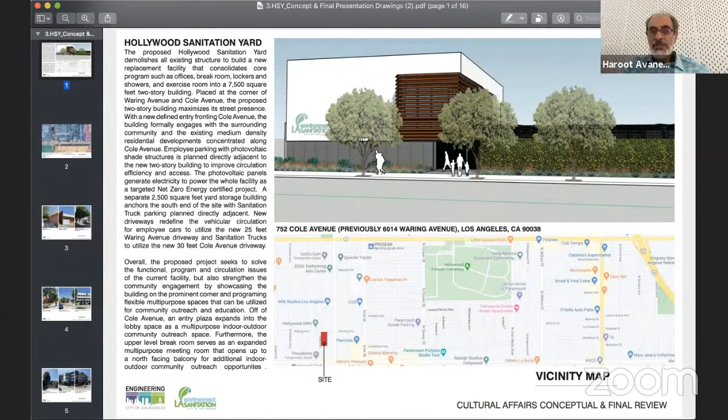Celso Del Pozo is the project manager from the city, and it's all city designed and presented - city architects. Jenny Lim is the architect, and design associate Melissa Lam. I saw their names waiting to present. So will it be Jenny Lim or Melissa Lam presenting today? Might be Celso that does it. Celso? Oh, is it Celso? Perfect, we'll hand it off to Celso.

Yes. Celso, are you there? Are you with us? I'm here, can you hear me? We can hear you. Oh sorry, I was looking for a visual, but yes, if you'd like to give a little introduction, or will you be presenting to us today?

Just giving an introduction, as Harout said, this is a new project. I just want to give you a quick overview of what this project is all about. This is the third of a series of five sanitation yards being redeveloped. The first one we did is the South District Yard, in Council District 8, which we just finished construction on last July. We're doing this one after the other.

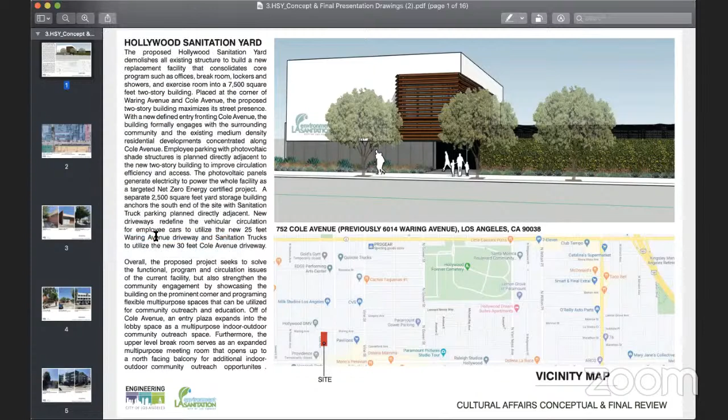The second project we did is the North Hollywood Yard, in Council District 2, which just started construction last March. There are two other projects in the pipeline - one in Council District 3, and the next will be West LA, I believe, in Council District 5. With this Hollywood Sanitation Yard, it's expected to start construction about mid-2022.

The primary function of this yard facility is to house service vehicles that are dispatched daily to maintain and service storm and sewer infrastructure throughout Los Angeles, including responding to everyday emergency calls for service. Next slide, please.

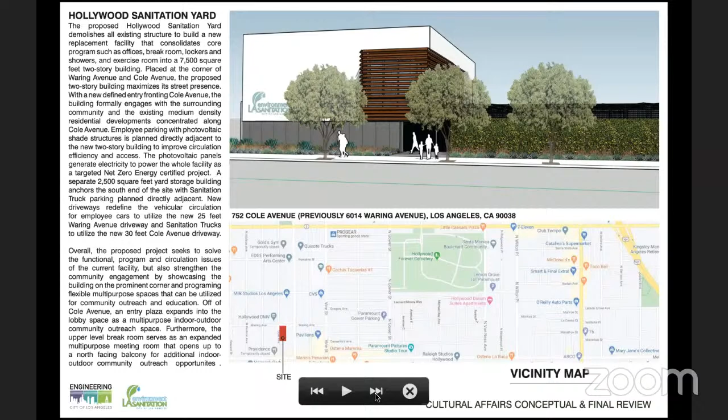This facility has been in service for over 50 years. It was actually built in the mid-60s and has outgrown its current functional needs to support daily activity in the yard. The existing facility, as you can see, is lacking sufficient space to house today's large vehicles that they use every day.

That being said, the only viable solution is to demolish those underutilized buildings and redevelop the entire site to have efficient circulation within the facility.

This proposed project will also follow the strict sustainable guidelines of the USGBC LEED rating, with the goal to attain gold level certification. In addition, just like the previous yards we did, this will also be designed as a net zero energy facility, utilizing a photovoltaic panel system that will generate up to 100% of the facility's electric energy use.

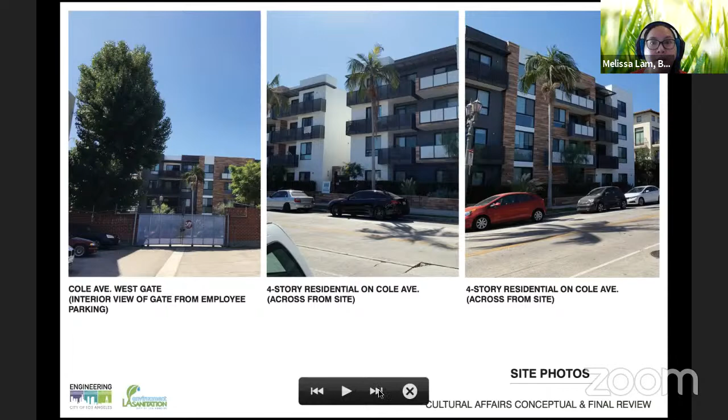In the next slide, we have a site diagram of the proposed project. This diagram shows the new two-story building placed on the corner of Waring and Cole Avenue to maximize street presence. The left side of the site serves as administration with potential community use, and the right side serves the yard functions with one-story yard storage.

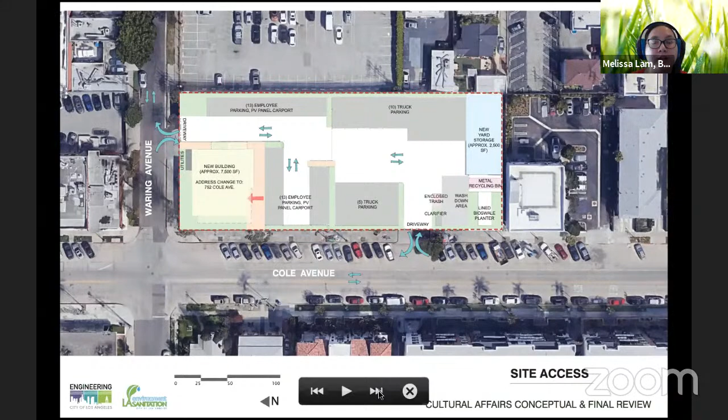The next slide is a more detailed site plan. We've designed the two-story building to be a compact footprint, aligning with the all-electric building, net zero energy, and LEED certification goals. The parking adjacent to the building is shaded with photovoltaic canopies that generate energy for building consumption. The new defined entry is off of Cole Avenue into a plaza where there's opportunity for community events. The building is also set back, which allows opportunity to provide landscape along both street edges.

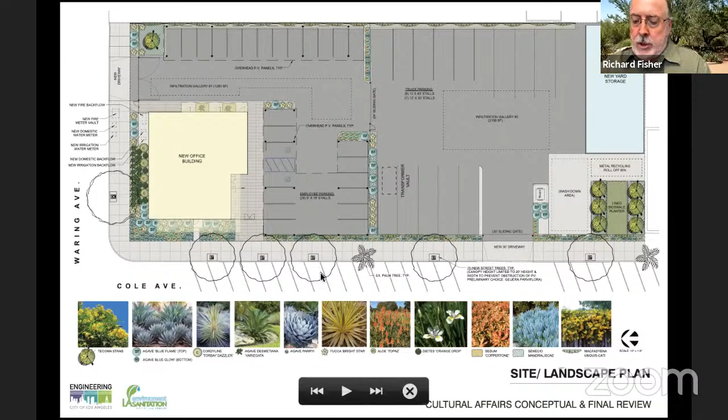Welcome. Thank you. I want to speak a little bit more on the building, more specifically. Next slide, please.

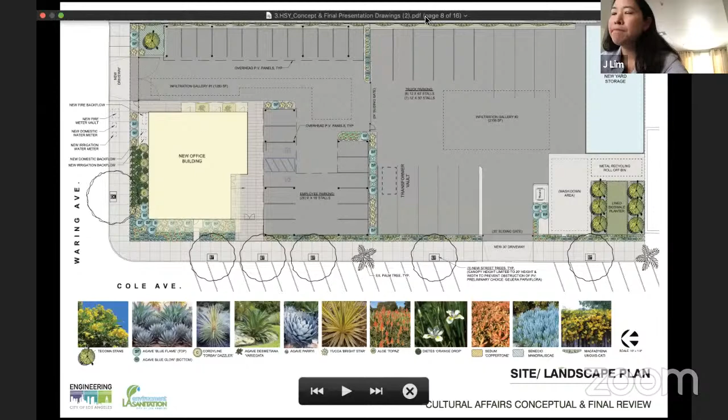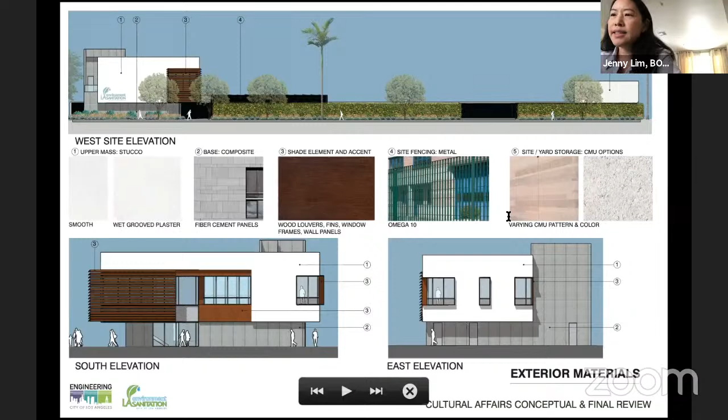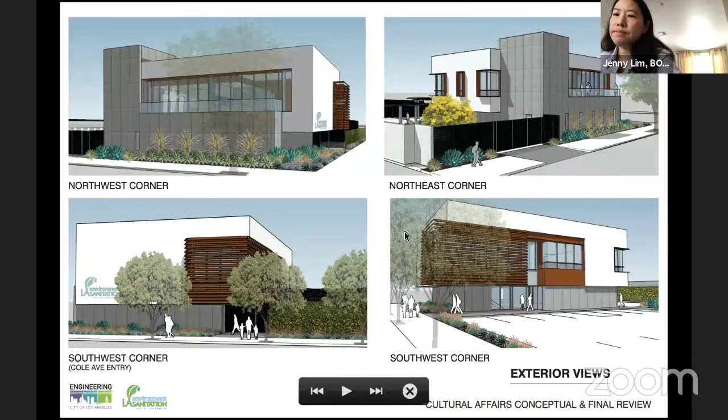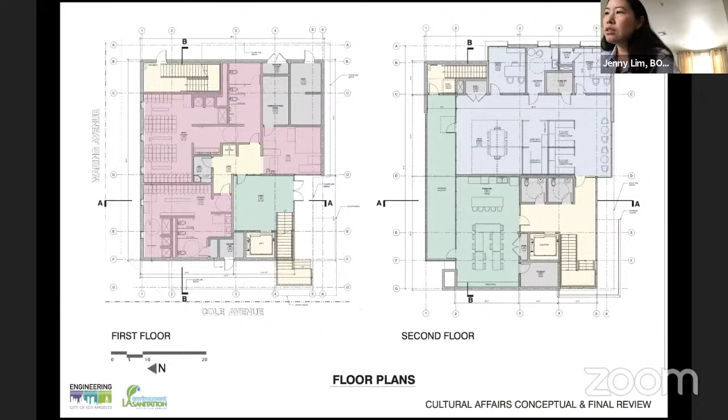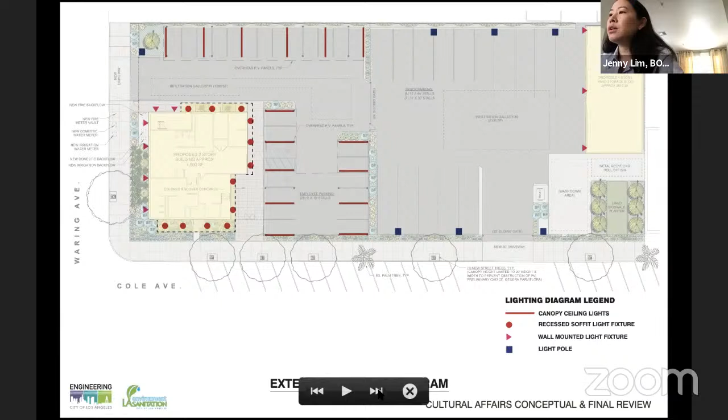This is a lighting plan diagram showing the location of the fixture types at night. Conceptually, the lighting concept is to highlight the building as a beacon within the community. Wall-mounted lights and recessed soffit lights wash the building walls and illuminate the landscape. They also indirectly light pedestrian paths for nighttime security. Parking is also well lit with canopy ceiling lights and pole lights at the truck yard.

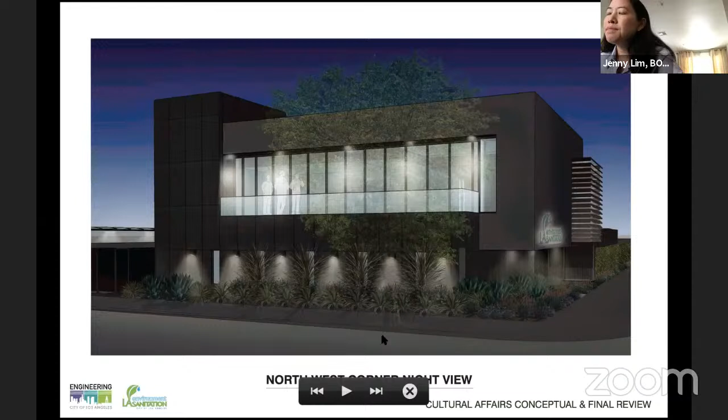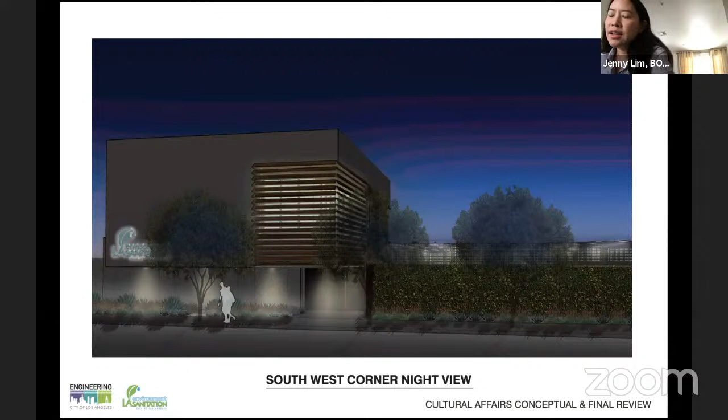Thanks for your support. Are there any questions about our project?

Sorry, I was on mute there and talking. It's a sign of the times, I suppose.

I'll go ahead and open it up for discussion, questions amongst the commissioners. I will call on you if you have any questions or comments, please indicate so. Mr. Paquette.

I know the area very well. I run by your current facility often, and it's like you're building this beautiful new monument compared to what it currently is. So, Richard and Jenny, I appreciate the effort you've put into making this something spectacularly aesthetically pleasing, a well-needed upgrade. I'll leave it to my more seasoned colleagues on the architectural design aspect, but I want to applaud you for changing the neighborhood.

Thank you. Excellent, thank you very much. Commissioner Jefferson.

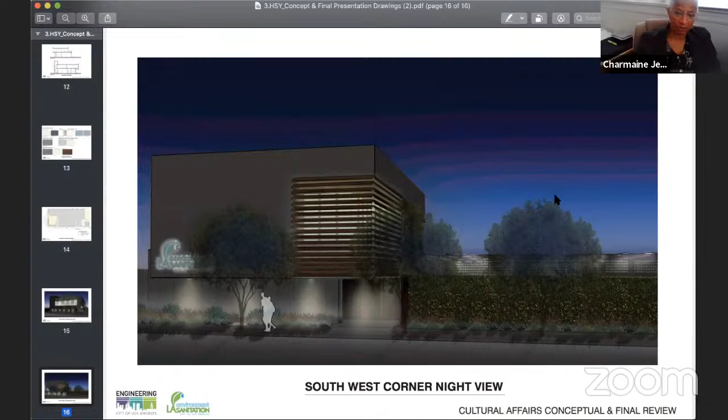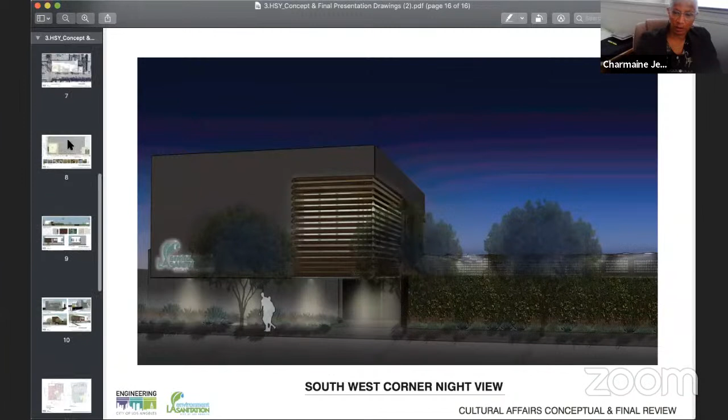I would agree. I think this is not only a marvelous step up, but it adds some greenery to a block that doesn't otherwise have a lot of it. So that in and of itself is a great addition for Los Angeles. I also appreciate that there are some wood elements in this, even if it looks like wood but isn't really wood, so it'll last longer. Appreciate the approach, so thank you.

Commissioner Ho. I may have missed it, but can you share any kind of community feedback or outreach that was done or submitted?

When we're speaking of outreach, LA Sanitation has a lot of these type of events where they might host open house or educate community on sustainability. Our team in itself hasn't reached out to the community.

Okay, and is that part of the process? It's a beautiful building, so I want to be mindful that the community had some kind of input, that you were accountable, as every department or project is accountable to community feedback. I don't know if that's part of the process, but I'd like to hear if anything was done for this project, but it doesn't sound like anything's been done.

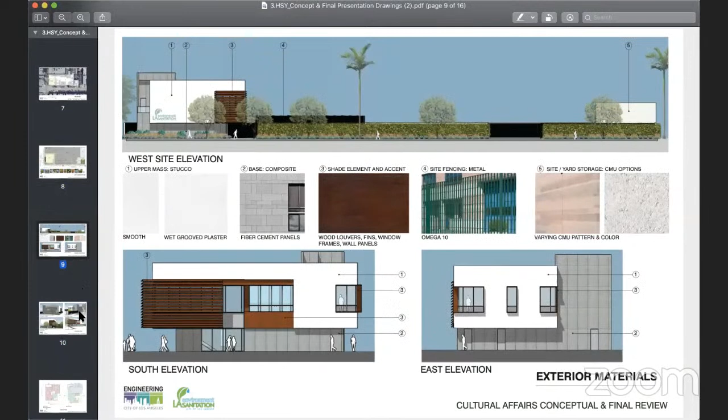But have you thought about where it might be on the site, or has there been any consideration for that? Right now we have a design of the facade with some open spaces, but we would like to leave it to the artists to see what they believe fits their art. So that can be decided as we go through the process.

Okay, excellent. Anything else, Commissioner Scrafano? No, looks excellent. So, Commissioner Jefferson has a question.

First off, I wanted to thank Commissioner Ho for raising that. I walked into this just assuming that it had already had public comment, and forgive me for not having that in my head. I agree with that question. So I wanted to suggest that we approve it for conceptual approval, and do final review once we know that community input has been there. And I don't just mean the councilman.

I really commend the idea that this building was designed by our own city architects. I just think that's fabulous. There's such expertise within our city all over the place. Not that I'm against hiring outside contractors and architects to do work, but this is a great example that it can be done on the inside. I think the community will probably be very pleased and supportive, but so that we avoid surprises, and that we also don't set up a precedent that things come to us just because they were done inside the city without community input. I don't mean to suggest that was anybody's intent, I'm just saying that's why this would be the best approach for us at the moment.

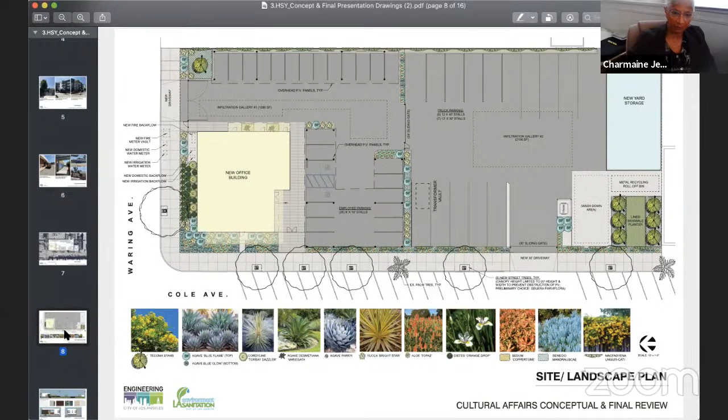Appreciate it. Let me first see if there's any public comment on the item. If there's anyone joining us telephonically with public comment for item 4B, please indicate by raising your hand with star nine. Mr. Bay, please let me know if anyone has pressed star nine to raise their hand. There are none at the moment.

Okay, there being none, interpreting the conversation we're having, is there a motion to provide conceptual approval for the Hollywood sanitation yard before us? I so move to approve for conceptual. So moved for conceptual by Commissioner Scrafano, seconded by, I believe I heard Commissioner Paquette. All right, then I will call the roll.

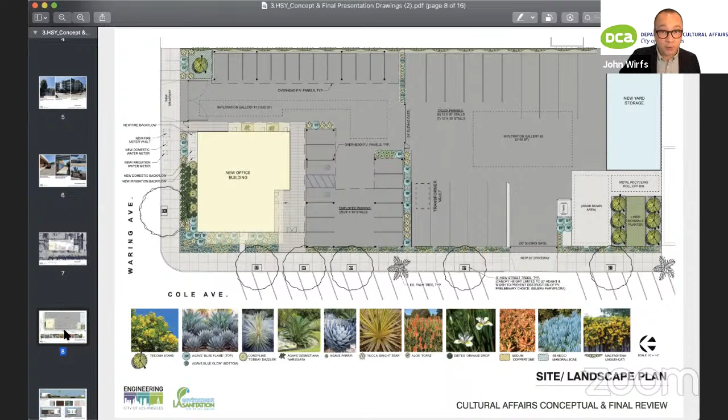Commissioner Paquette, how do you vote? I vote to approve. Excellent. Commissioner Jefferson, approve. Commissioner Ho, approve. I'll take that as a yes. Yes. Commissioner Scrafano, yes. Excellent. Motion carries. Congratulations on conceptual approval, and we will see you for final approval in the future.

Thank you. Thank you very much, everyone. Thank you. All thank you. All right, let's see here.

Moving on to our next item, we don't have any public art projects before us. We do have street lighting submissions, item number 6. We've got a series of matching street lights before us, as well as one non-matching. Mr. Avanesian, would you like to chime in?

Well, this agenda is even simpler than the last time, because there are basically two kinds, one metal and one type of concrete, the most common ones used. So there's nothing new, most of them match the other. There's no existing light, so they're putting in the most common type that matches the area. The one non-matching fixture is because there's no existing street light, so this will be the first to set the tone for that.

All right then, is there a motion to approve item 6 for street lighting as submitted by staff?